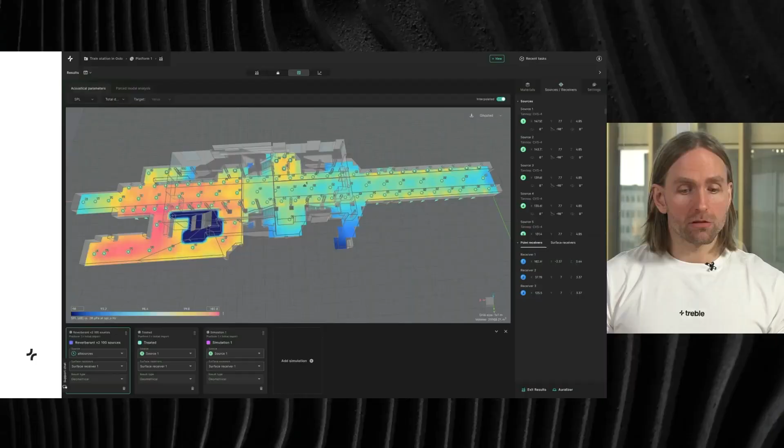Okay, before diving into the SDK, just 30 seconds on the application in case you're not familiar with that product. The Treble web application looks something like this. It's a fantastic simulation software for a variety of use cases. I've summarized perhaps the main ones here, which is architectural acoustics and sound system design, acoustic materials, we have a lot of material manufacturers and vendors who also use the application, and soundscape design. And exactly 3 weeks ago, we had a major webinar event where we unveiled the biggest update we've ever released on the web application.

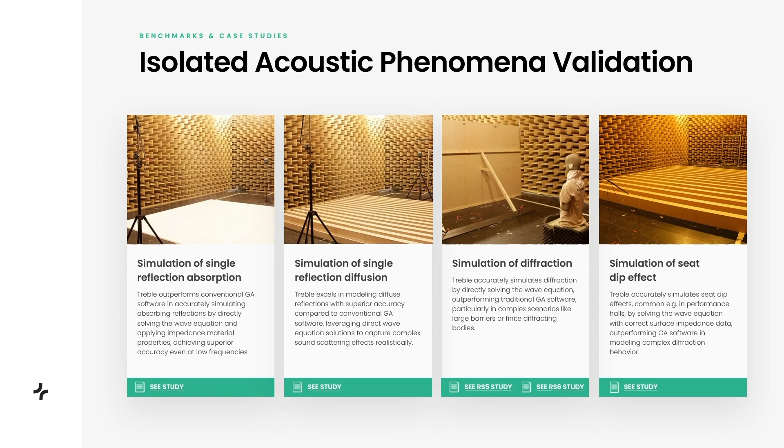We have applied it to isolated acoustic phenomena cases, such as diffraction around an object or reflection of a complex surface, benchmarking against a good database of measurements called the Benchmark for Room Acoustic Simulations. We've also applied it to several types of rooms and environments and shown a very good match between measurements and simulations.

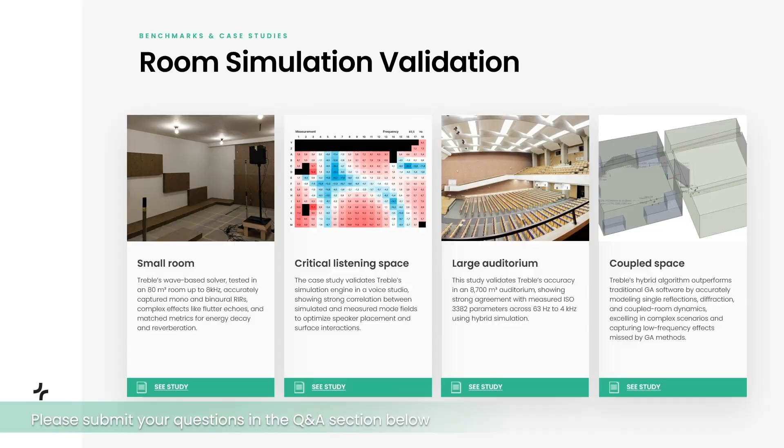Okay, that was the intro overview presentation. I think we now just dive into the use cases and the demos.

First use case we're going to dig into is product virtual prototyping. By extension, we'll show a lot of the fundamental functionality of the SDK and how to set up a single simulation, work with the results, and post-process them.

Let's imagine that you are a headset manufacturer and you want to optimize the headset you are designing or producing, either the hardware itself, the form factor, the positions of the microphones in the microphone array, and you want to be able to virtually prototype that in a variety of acoustic conditions. Or you're developing some kind of algorithm within the device, potentially a data-driven DSP algorithm, and you want to generate high-fidelity data to train or evaluate that algorithm. That's exactly what the SDK is made to do, and we'll show this right here and now.

So in this kind of scenario, you would like to set up a virtual audio scene. An audio scene can look something like this. It's a simplified sketch where we have the receiver device in question with some microphones on it, some environment with furniture and things like that, target sources like speech sources you want the device to pick up, and distractor sources like a coffee machine that you want to reduce. We can set up audio scenes very easily in the SDK, have them simulated with high precision, and render device-specific output for those scenarios.

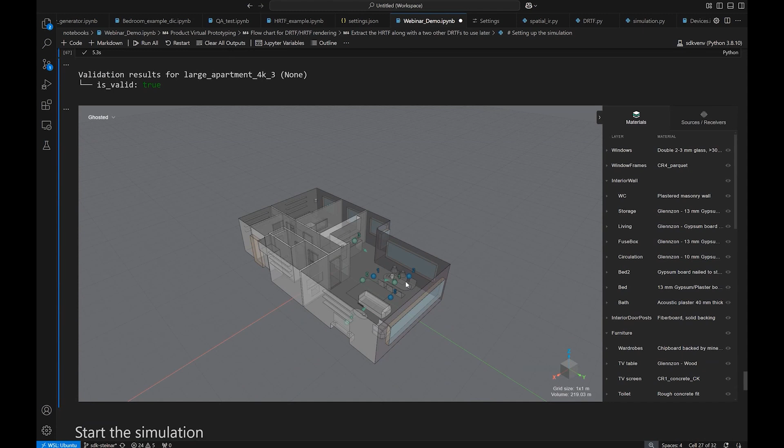And we can plot the setup of this audio scene that we've now generated. We can see something of a dinner party, where we have a couple of sources which can be people talking - this is the speech source, this is actually the omni source - and then two sources here, which could be distractor sources from the TV and from the coffee machine, say. Then we have three receiver positions, these spatial receivers, which we will mix with the devices in post-processing. We can see all the materials we assigned and so on.

All right, and in order to run this simulation, I would simply run these 3 lines of code here. It takes a few minutes to run, but I've already done it to save some time. So we can simply, with these lines of code, fetch the latest simulation results from this project.

And we see here the impulse response. If we zoom in on the direct sound and the early reflections, we see that microphones 1 and 2 have the same amplitude. These are the microphones on the left side. And then the microphones on the right side have lower amplitude and of course also arrive at a later time.

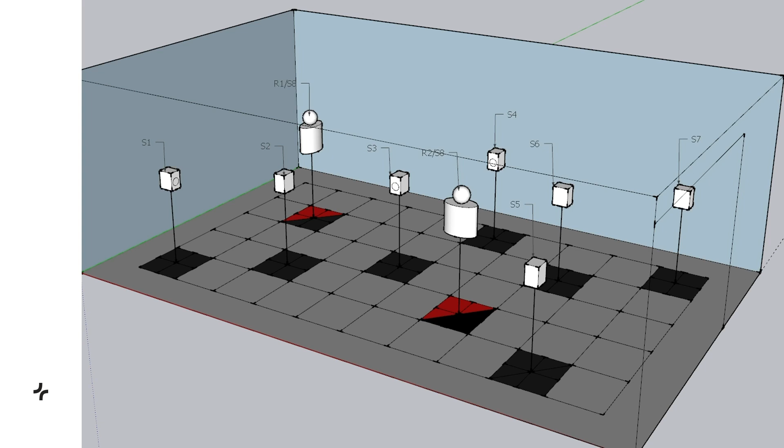Okay, let's first look at the empty room. It looks something like this. We excite the room with a directional sound source, and in the simulation we also use a directional sound source. We consider a variety of source and receiver combinations, and in the simulation, for the binaural part, we use the approach I showed earlier, where we simulate a spatial room impulse response, and then in post-processing we mix the spatial impulse response and the HRTF to get the binaural or device-specific output.

But if we first look at the mono results, here in the time domain, we see an excellent match between measurements and simulations. The early reflections are captured very nicely, and the overall energy decay as well. In the frequency domain, also a great match. The low to mid frequency modal behavior is captured nicely, and the high frequency trend is also captured very well.

Energy decay at different frequencies looks very spot on. It of course helps that in this case we know the material properties of the wall materials quite well, so there's good input data into the simulation. These are acoustic parameters. This is T20 and this is early decay time. Great match observed. Note, for example, here in the mid frequencies, this interesting increase in reverberation.

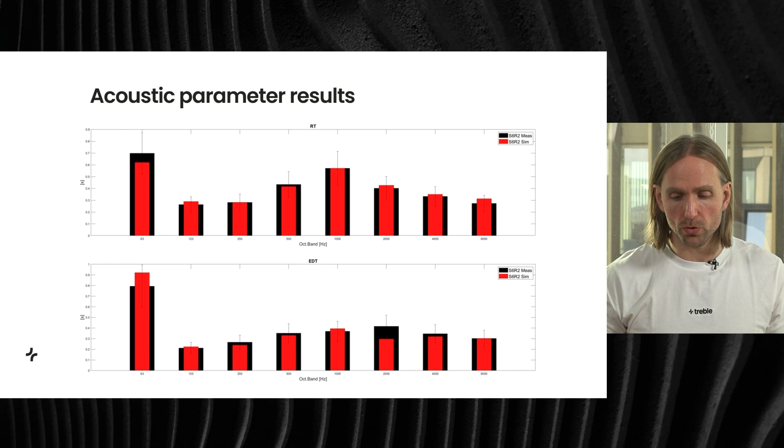This is due to a 2D sound field living between two hard parallel surfaces, which is very well captured in a wave-based simulation. And then the binaural results also look fantastic. This is the right and the left ear for one particular source-receiver combo. Clearly the receiver's right ear is facing the source. We can also have a listen.

Here we have an anechoic recording of a speech signal and a music signal. And then we've convolved that with the binaural room impulse responses, both the measured ones and the simulated ones. And let's have a listen. First, the anechoic speech sounds something like this.

Noise and poor acoustics have been shown to be a major factor impacting our health, well-being, and productivity.

And then in the measured room.

Noise and poor acoustics have been shown to be a major factor impacting our health, well-being, and productivity.

And the simulated room. Noise and poor acoustics have been shown to be a major factor impacting our health, well-being, and productivity. And for the music, first anechoic.

Measured room. And the simulated room. I hope it comes through clearly in the webinar and in stereo and all that, but I can at least say in my totally unbiased opinion that they sound actually very similar.

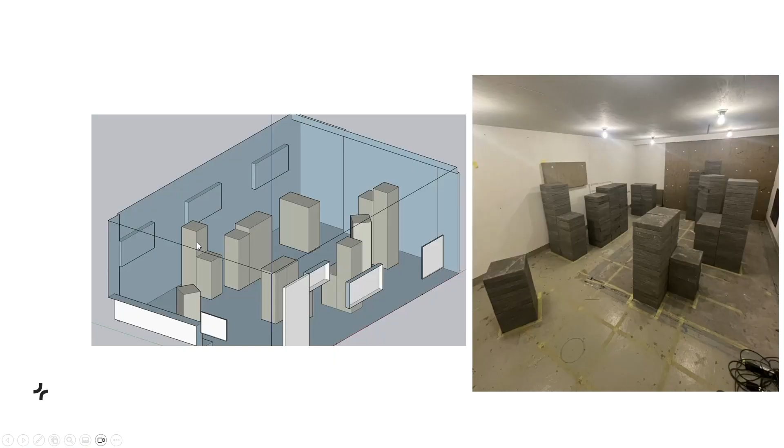Okay, now we turn to the complex geometry case where with all the bricks, the 10 tons of bricks, it looks something like this. So the geometry of the room has been modified substantially, and it's a much more complex case, you can say. But the results look, I would say, equally good as before. Here we're looking at mono results, time domain, excellently capturing these early reflections. Room modes, again, captured very nicely, and the overall high frequency trend as well.

Energy decay still looks absolutely spot on. And binaural results with the KEMAR mannequin also look fantastic. Look at these early reflections here and the difference between the right and the left ear. Same with the frequency response, the room mode behavior here, and the high frequency trend, the ear canal resonance, and these things are all absolutely captured in the simulation.

And finally, the furnished case, where it looks something like this. And yet again, measurements and simulations match up very well. This is one particular source-receiver combo. Here's another, looking equally good. Energy decay, very good. And binaural results look excellent as well. Here in the frequency domain.

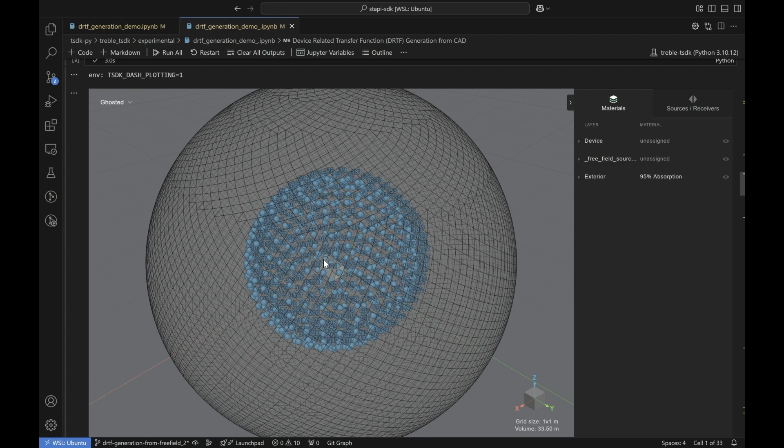Then I can simply run it here, or if I've already run it, which I've done in this case, then I can fetch the results from some IDs and plot and explore and so on. So this is the setup of the DRTF simulation. So the domain is a sphere here. The device is in the center, and then there are all these receivers around.

And if I zoom in here, we can see the microphone positions here, and then we simulate essentially the free field response from all these microphones to all these receivers on the sphere. And that's then what makes up the DRTF dataset.

Once the simulation is run, we simply run this create DRTF command, and that's already been run, and we can add it to our library of devices. And that's it. Then you have your DRTF, good to go, ready to augment data, create 100,000 room responses with this device in 10,000 different audio scenes or whatever you would like to do.

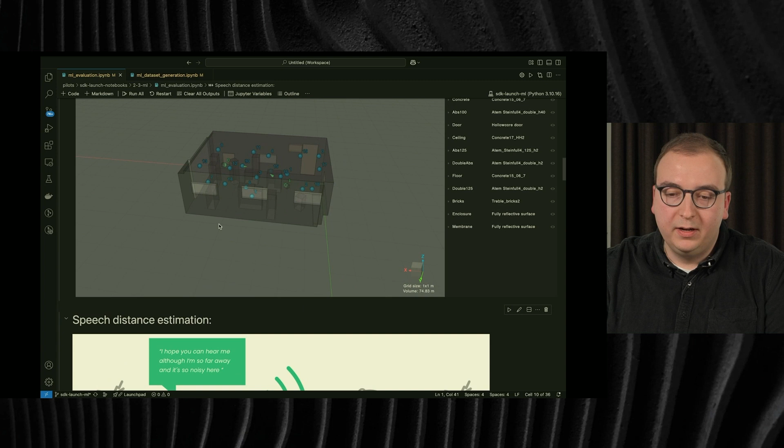And I want to start by just reading in the simulations that we have done, and I can show you once again what this looks like. In here we have a couple of source receiver configurations, but because these were done similar to the measurements, we only have a couple of them. In fact, it's only 20 source receiver configurations because doing the measurements just takes a lot of time and it's kind of costly. That's why we only have so few points at first.

And what we want to do is speech distance estimation, as I already said before. And you can think about this similar to this application scenario here in the picture. We have somebody who is speaking with a friend, and the friend, for example, has some AR glasses or some other wearable that has a microphone on it. And the person is speaking, and we record the speech with the microphone.

And from that recorded speech, which might be, first of all, quite noisy because we have background noise in there as well, but most importantly, it is reverberant because we are usually inside of rooms. And based on that reverberant, noisy speech, we want to estimate the distance between the speaker and the listener. And this information is very important, for example, if we want to run some speech enhancement or de-reverberation algorithms on the AR glasses or on the wearable device.

And I want to use the following neural network to showcase how we can use the Treble SDK and the simulations for evaluating a neural network. This network was proposed in this paper that you can see referenced here.

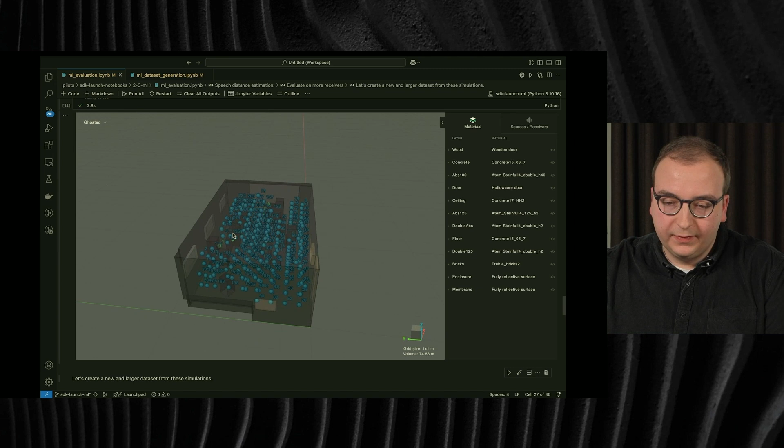So let's have a look at another simulation that we ran from the same environment where we added more receivers. And as you can see here, we have now added very many receivers in there, and they are on a very dense and fine grid of receivers throughout the room. So by using this simulation, we can get a bit more, or actually a lot more comprehensive overview of how our model performs on this specific task in this specific room.

So let's set up the dataset again and run the evaluation once again. And because we have now so many source receiver configurations, this takes a bit more time. But this is also then down the line very interesting for us because we have more receiver configurations. We have just a better overview of how does the network perform. So let's wait until this completes.

All right, the evaluation completed, and we see now a mean absolute error of 1.62 meters, which is still very similar to what we saw before, but we can also now, of course, have another closer look at the results. And we see here on the left side the Treble simulations with only few data points. In the middle, we see the measurements with the matching data points. And on the right side, we see the Treble simulations where we have a lot more receiver positions in there.

And we see, of course, there are similarities between all of those, but what is very clear as well is that we have more receivers, and some of them seem to be outliers where the performance of the network is not as good as for the 20 selected points that we were able to measure. So this is, of course, very interesting for us because without having to do lots and lots of measurements, we get a lot more information about the performance of our model. And now we can also easily have a closer look.

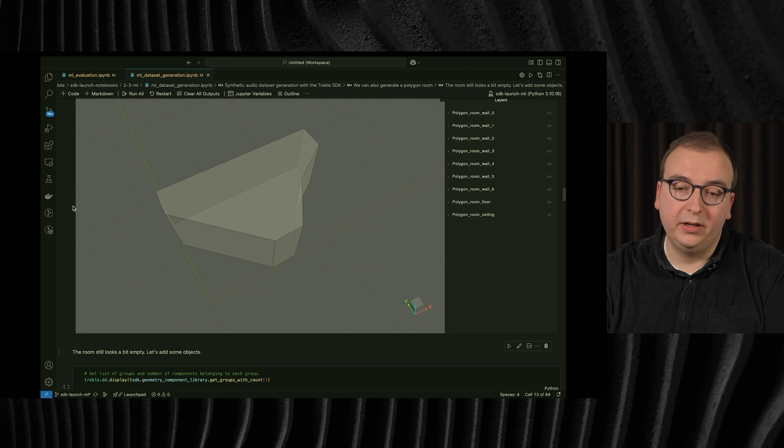All of the rooms that we've seen so far were pretty empty. So this is, of course, maybe a bit boring. So let's add a couple of objects into the rooms. Also there we have you covered. We have a geometry component library, and you can see here we have a couple of different groups in there, for example, tables or beds or sofas, and all of them have already a couple of objects in there.

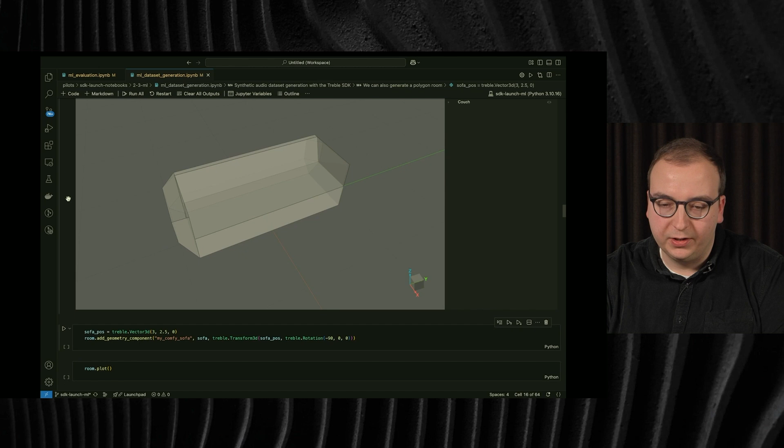What is very important to note here is that this database is being worked on, and we will get more of those objects very soon. So let's start with one of the sofas. This looks something like this. And already here you can see, of course, this is not a sofa that I would put into my flat, but it's actually one that is optimized for room acoustic simulation. So you have nice and flat surfaces, and it's just kind of easy to use.

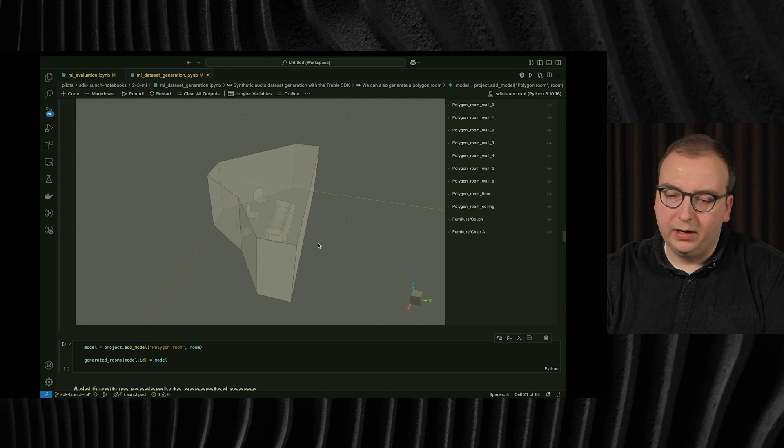Let's place the sofa now in our room, and we see, okay, we have our polygon room and we have the sofa in there. Maybe let's add a couple more chairs. The chairs look like this, and we just add 3 of them. And now we see, okay, we have our polygon room, we have 3 chairs. This will not win an interior design award, but this is something that gets us started.

If you don't want to place these furniture objects yourself, we can also randomly add them to the rooms, and this is what we're doing now. In this case, we use our geometry component placement, where we can say we want to place, for example, a table or a chair or a sofa, and we want to have a certain count in each room, which is usually the maximum count, because sometimes the rooms can just be too small and we don't fit all of those in there. But then we say, okay, they can have certain angles. For example, we want to orient the tables in 90 degree angles, and they should have a minimum distance from other objects in the room or from walls, something like that.

And we will now do this and populate all of our 200 previously generated rooms with furniture. As you can see here, this is taking a bit of time, but those are now randomly placed into the rooms.

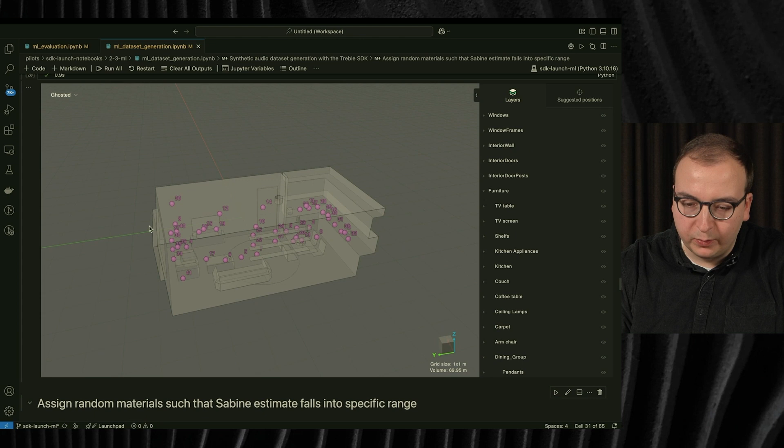And if we want to have a look how this room looks like, we can do that. And we see, yes, this is a living room where we have a nice sofa in there and some armchair in there. And we have some table with chairs as well.

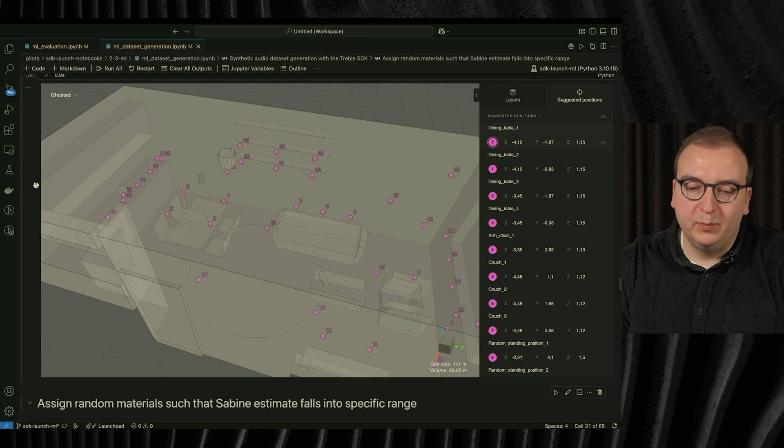And what you can see here as well is actually the suggested positions. You can see here we have suggested positions at the dining table, for example, but also then at the armchair and the couch and so forth. These suggested positions will be very useful for us later, because at these positions we can, for example, place sound sources or receivers. This way we can place them at positions that are actually meaningful for that scene.

What I want to do now is randomly add materials to all of the layers. Once again, we see here the material library that Finnur already mentioned. We randomly place the materials at all of the 300 rooms and make sure that all of the material assignments are within a Sabine estimate of 0.4 seconds and 1 second.

Now that we assigned the materials for all of those 300 rooms, we can have a look how it looks like, and we can see we have generated a T-shaped room, and we have assigned the materials, and we also assigned the materials to the furniture that we added.

Now I want to go back to this application scenario that I already mentioned in the previous notebook. So we want to do speech distance estimation. We have some speaker talking with somebody else, and this other person has a headset or AR device, for example, on it with microphones, and we want to estimate the distance between those two while we have background noise.

To simulate this, we will add a couple of directional speakers in our scene, and we will add a couple of noise sources, which are omnidirectional sources, into the scene. In addition to that, we will add a couple of receivers, and those will actually be spatial receivers in this case, second order ambisonic receivers, but we could also, if we wanted to, go up to 32nd order of ambisonics.

I am Daniel, I'm the product manager of the Treble SDK, and I'm going to show you a few use cases here at the end.

So the first one is this parametric study where we examine a studio, this one here, and we're going to place subwoofers in different positions and evaluate which one is best for the coverage and for the typical listening positions in such a studio.

Then we're going to put in 2 full range speakers so we can have a nice stereo experience in this recording studio.

What powers this parametric study is this very nice feature that is coming with the Treble 2.0 release. We call it the boundary velocity feature, and it basically enables you to model any speaker that you may desire.

You can think of a speakerphone on a table, or a smart speaker, or some floor speaker in a living room, or these full range speakers, a subwoofer in this recording studio.

Essentially, you have a CAD model, or we help you generate a CAD model, and we take care of anything for you in terms of doing this boundary velocity.

Essentially, you just have to specify the membrane that vibrates, and then we assign some velocity to that, so it's like a piston moving back and forth like a real loudspeaker, and then some simulation settings so we can get the correct directivity and source correction filters and so on.

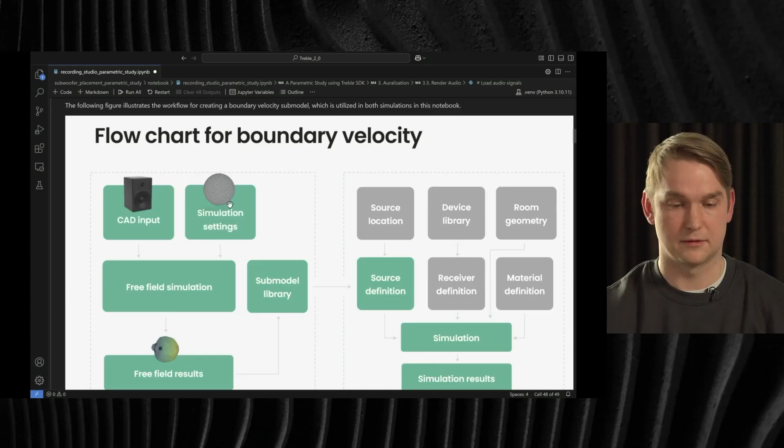From that, we create a free field simulation and an anechoic simulation of the device, and that will give you some free field results such as source correction and directivity.

We import that into a submodel library, and then you or anyone in your organization can use that when you define sources and create simulations.

So here I am analyzing a recording studio, but maybe next week a colleague of yours is doing a living room and they need a subwoofer model. Well, then they can access this shared submodel library.

You already did all the work. They can just import that into the simulation and they have a subwoofer.

So let's get started. First, I just log into the SDK and I get this project, subwoofer placement.

And then the first thing I do is construct the subwoofer. So here I make a free field model based on a CAD geometry.

Here I import a 3DM file of a subwoofer. And then this gives this free field model where we see the subwoofer in the center and this kind of anechoic sphere around it.

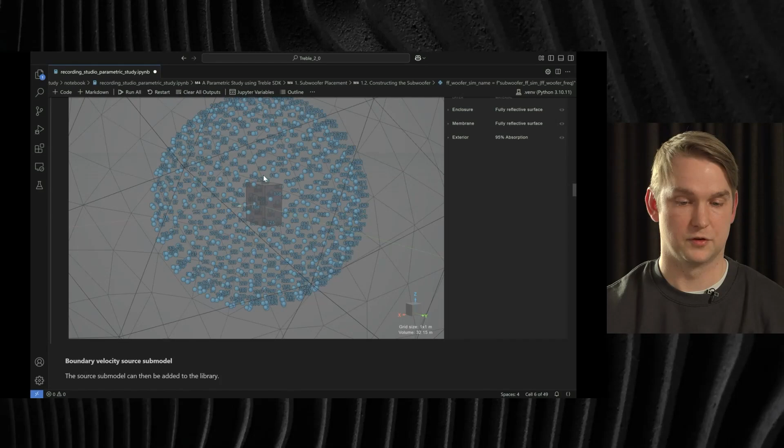The next thing to do is we create this free field simulation. So if you recall from the flow diagram I just showed you, we have a CAD file and then we have some simulation settings. Those two combined give us this free field simulation. So that is essentially what we're doing here, specifying the membrane that vibrates and so on. So that will look like this. So suddenly there is a sphere of receivers around the device that we need. You can see the membrane here and so on in the plot.

And then the last step in defining this boundary velocity submodel that can then be injected is to add it to the submodel library. And that sends the CAD file of the loudspeaker. It sends information about the directivity and the source correction filters needed. What this enables you to do is now I can inject this CAD model into any room.

It uses the actual CAD model in the wave solver, accounting for diffraction of the edges of the box and so on. But we also have the directivity information, which means that if I choose to run a hybrid simulation, I can account for the CAD geometry of the speaker up until the cutoff frequency of the wave-based solver, and then above that frequency we use the directivity and model this as a directive point source, which is in my mind a very strong feature.

You can, since it's a CAD model, also place it very freely in the model. So I could place this source on a table. In this demo, we place it on the floor. It could also be on the wall.

So with the source ready, we can go ahead and define the room. So here I use the import functionality of the Treble SDK to import this studio control room. We use the 3DM file here, and we do a check to see if the geometry is valid. We do that on all imported geometry, so we check if it's watertight or there are any other errors in the model. And here we see it.

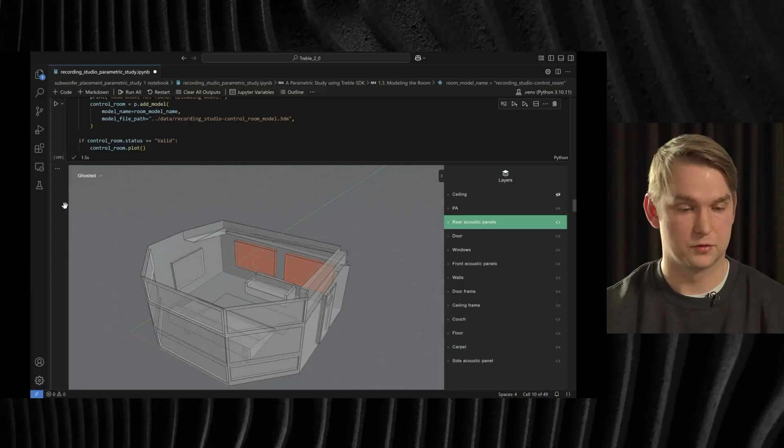Yeah, it consists of a couch, this mixer in the front. Can maybe use this here to highlight. We see some windows. We have these rear acoustic panels that we're going to work a little bit with. So I'm going to demo how you can build your own absorbers in Treble quite easily using our material builder. So essentially I just need to define 3 parameters to create a new absorber in Treble using this porous material builder. So I define a porous layer thickness of 50 millimeters and a flow resistivity of 10,000.

And then finally, I also want to have an air cavity behind this porous layer, and I say that in this case it's 100 millimeters. All the materials are then terminated with a rigid backing. I can then go ahead and run this code. I've built the material and added it to the material library, and we plot it just to verify that it looks as we expect across frequency. We can see the absorption coefficient here, but also the reflection coefficients over here on the right.

The next step in setting up a simulation is that we want to pair the layers in our room model with materials. So we take, for example, the couch layer here, and we pair that with upholstered seating, well upholstered. And we use the material library in the Treble SDK to find this material. Similarly for the walls, we find some gypsum material that we like, and so forth. Most of these materials, except for one, we just use the Treble library that's free for everyone.

That is, a user of the Treble SDK. We have hundreds and hundreds of materials that you can use for the walls, ceilings, carpets, and floors, and so on. And then in the bottom here, we see we have this new material that we assign to these rear acoustic panels.

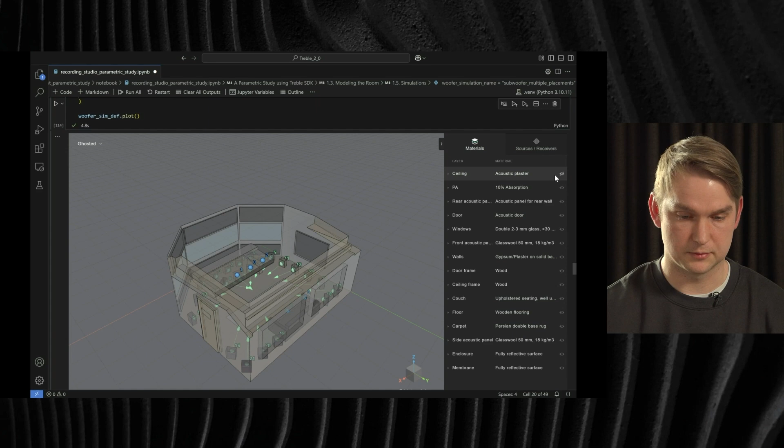With sources, receivers, and materials defined, we can go ahead and create a simulation. So we do that by making a simulation definition. Here we specify that we want to run a full wave simulation. We want to use the control room that we imported with the material assignment we just did at a crossover frequency of 400 Hertz. So we can go ahead and plot the simulation definition. I'm just going to hide the ceiling here so we can take a better look inside. We have 21 different subwoofers placed along the edge, and then we have these 5 spatial receiver locations here.

And we're going to run this in the cloud. If I had to run this, it would take a handful of minutes probably. Here, for the flow of the demo, I'm just checking if there's already a simulation in place, and there is, and we can then continue with those results for the parametric analysis. So here I'm fetching the results with this get results object.

What I'm then going to do is we have defined a cost function that essentially scores the different subwoofer placements. It takes into account the evenness of the frequency response. I don't want a subwoofer placement that causes a large dip in my frequency response that could indicate some modal behavior going on that's not very pleasant and something that you want to avoid. We're considering that there is a good energy balance on either side of the 100 Hertz mark. And then finally, the subwoofer placement should also have as little variance across all 5 listening positions as possible.

We are basically now in the post-processing stage, so I can go ahead and evaluate the cost function in all the 21 different positions. It's very fast. We want as low a cost function as possible. So we immediately see that to the right of this mixer, there is a very good placement candidate here. But we also see over here towards the right wall that there are some quite good placements as well, probably due to the walls having quite a bit of absorption here.

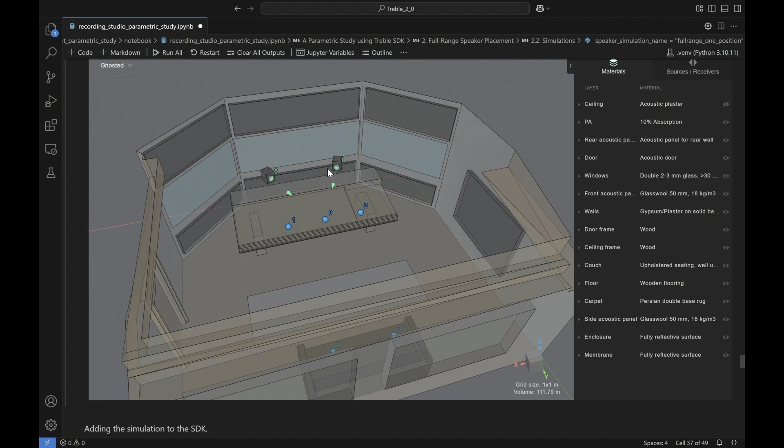So here we see the simulation definition with the 2 speakers in front of the mixer pointing towards this center position here. I can then add the simulation to the project. Again, I have already run it, so it checks, okay, it's not necessary to run this again. And I can then work with these results in the auralization part of this demo.

Before I do the auralization, I want to create an HRTF device essentially. Here we used a measured HRTF on a KEMAR mannequin. I apply the HRTF device on the subwoofer IR, but also of course on the left and the right channel. Then we have added the functionality to do filtering also on IRs. So we have a filter object that works on the IR object, in this case on the device IR, but it could as well have been a mono IR or a spatial IR.

For the woofer, I want to have a low pass filter, so I define a cutoff frequency of 200 with an order of 6 for the Butterworth filter. And then I also include a gain filter with a 0.3 to ensure that the woofer and the full range speakers have the same level. For the full range speakers, left and right channel, I use a high pass filter, also with a cutoff frequency of 200 to have the correct mix. And then it's very straightforward to combine the device IRs here. So for the left channel, we use the subwoofer plus the device IR for the left channel, similarly for the right channel.

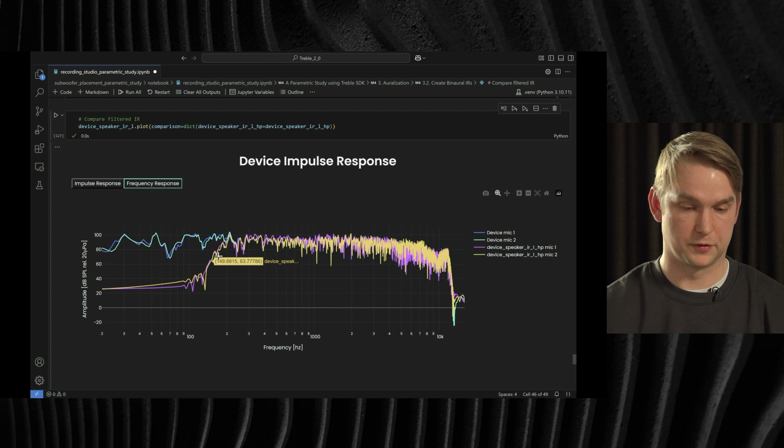We can then compare the filtered impulse responses. So if we look at the frequency response of the full range speakers, we can see that we apply this high pass filter here with a crossover frequency of 200, and we see it behaves exactly as we expect. So then we can convolve these device IRs with an audio signal. I'm just going to do that here. We are standing here in the center position of the recording studio and listening back to how does it actually sound.

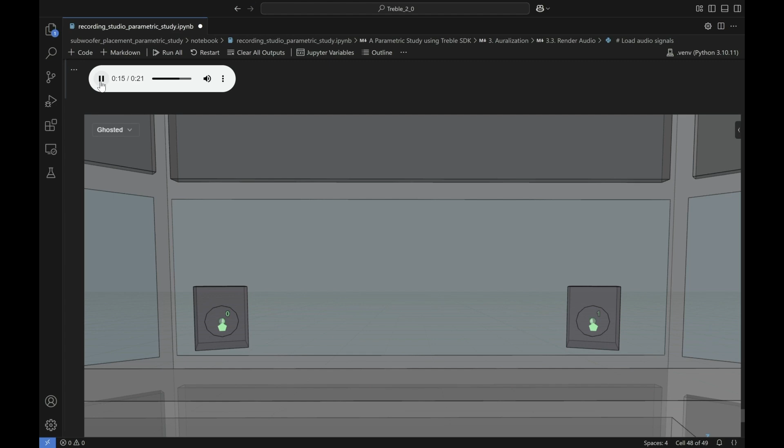So I hope this demo showed that it's very straightforward to do very advanced modeling in the Treble SDK. We import this loudspeaker geometry, we assign boundary velocity to it, we parametrically place it in the recording studio with fast simulations. We get the modal response and we can make quick decisions of where should I place this subwoofer in the room. Then we add in full range speakers with a hybrid simulation, and we can analyze the room and see, is this really a good fit? And it seems it is. And you can do this over and over again to converge to a result that you are happy with.

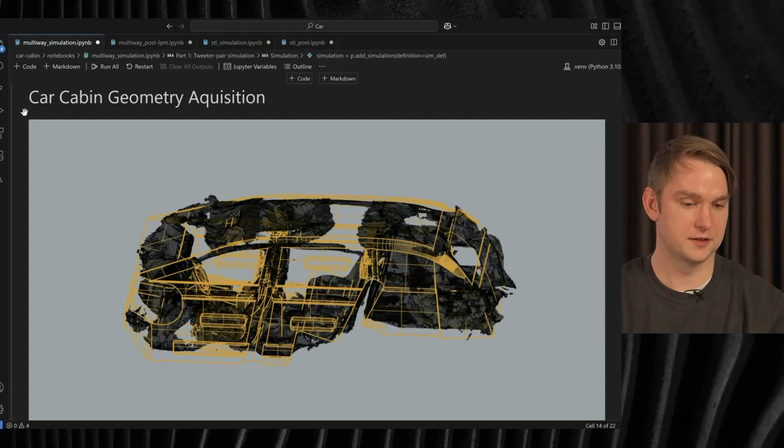Okay, next demo. Something different, but not completely. We're still in sort of the boundary velocity domain, but a very different environment than the recording studio we just visited. So this is a car cabin, and the initial geometry was obtained through a LiDAR scan, thanks to a very good collaboration with our friends at Audi. So thank you very much for that and the good collaboration.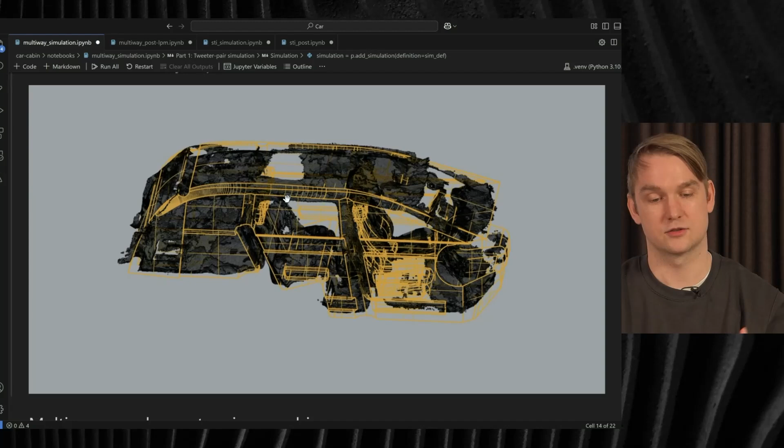We did a scan of this car and then imported that LiDAR scan into a CAD tool for further processing, putting in some more details and using the LiDAR scan as a background to essentially make the car model from. And then that car model can be uploaded into Treble to perform an acoustic simulation on.

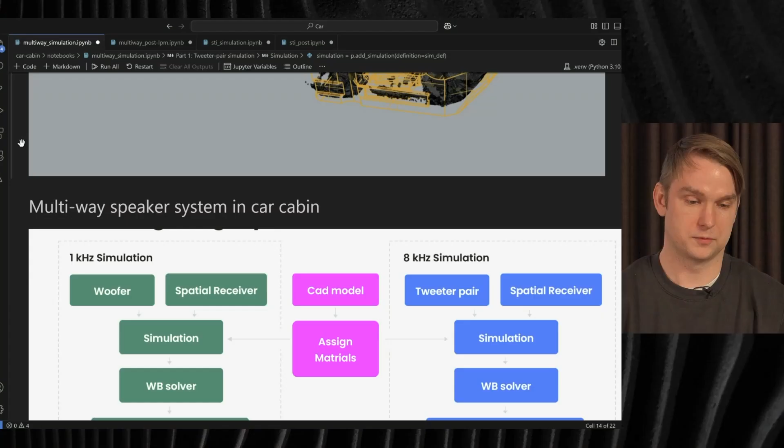So what we're going to do here is model an infotainment system in a car, a multi-way speaker system. We're going to do a 1 kHz simulation of a woofer in the trunk, and then a spatial receiver in the driver's seat. And we're going to do that fully wave-based up to 1 kHz. Then we're going to do a KEMAR rendering as we did before for auralization purposes. And this time the filtering will be done with a Thiele-Small parameter model, lumped parameter model. So we are going to create a physically informed filter here.

And then we're going to do an 8 kHz simulation of a tweeter pair situated in the car doors, also with the spatial receiver in the same position at the front seat. And this 8K simulation will also be fully wave-based. We're going to get some spatial impulse responses from that. We will render it with an HRTF of the KEMAR mannequin again, and then the tweeter response will be made from a lumped parameter model here as well. We'll combine them and then do a nice auralization at the end.

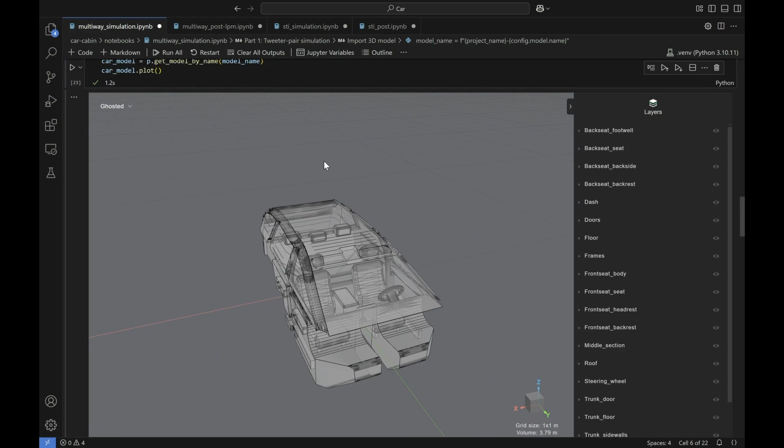So for the tweeter pair, let's first log into the SDK and fetch the car cabin project here. We're going to quickly import the 3D model of a car into Treble. That was fast. Look at this model, quite complex actually, and it's right here.

I'm impressed every time. Sorry about that, but this is just really, really cool with the level of detail you can do in the software.

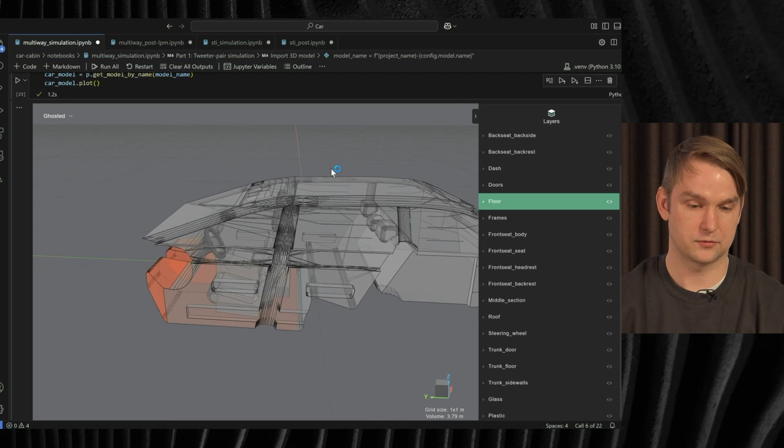Out here on the right, we see it's a very complex model. We have a lot of different layers that we have to assign materials to. So in the next step, the material assignment function is very condensed. We use a config file here for the material assignment that's hidden away, but of course available with the notebook. Just gonna run this here.

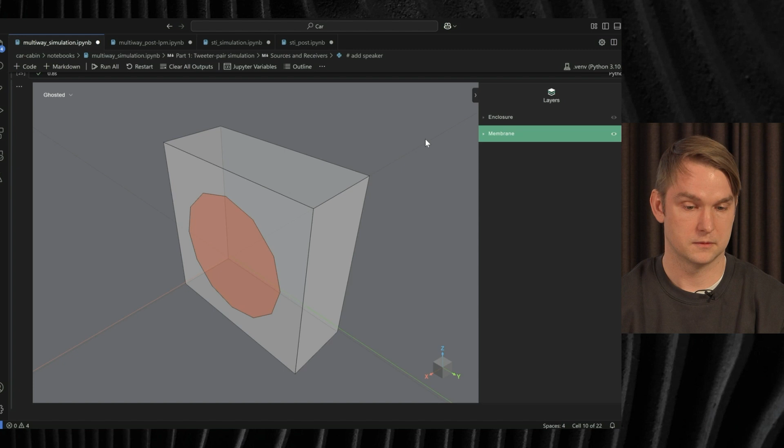And then we are gonna load a tweeter submodel. This time we're just gonna interact directly with this boundary velocity submodel library. Gonna query for the speaker name, and we have our tweeter. No further things are needed. We can just directly use that in the source list to make a boundary velocity source in the car doors. And then we're placing the receiver in the listening position in the driver's seat.

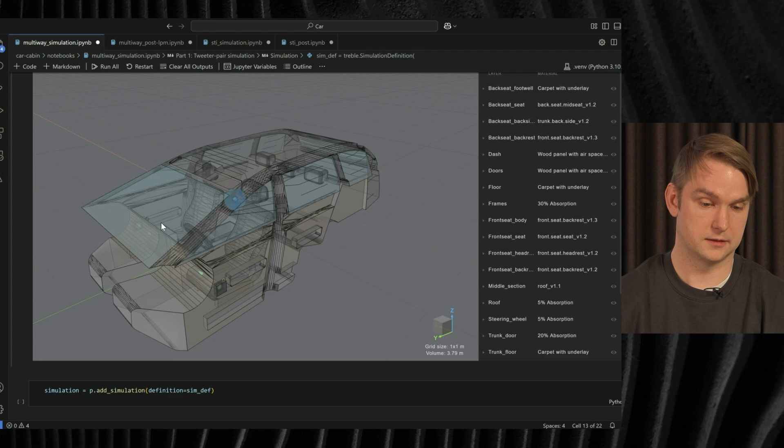So that's basically it. And then we will create a simulation definition with an upper frequency limit of 8,000 Hertz. So then the simulation model of the car will look like this. We have the tweeters here situated in the doors, left and right, and then we have the listening position here in the driver's seat. 5 blocks of code. You have a car in Treble plus a tweeter pair.

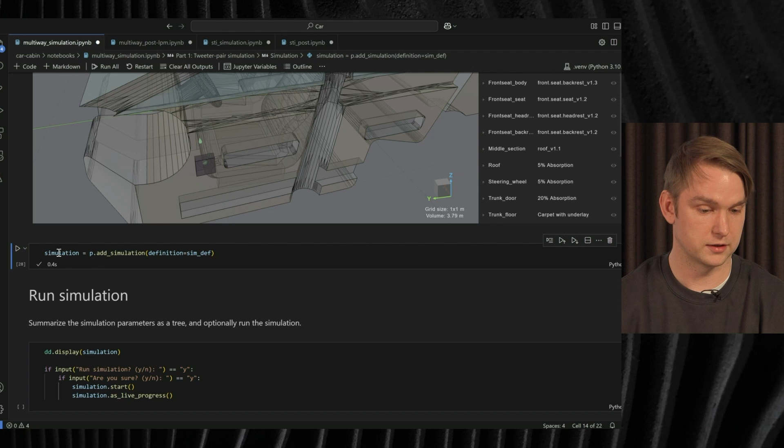Gonna add that simulation to the project, and then we can choose to run it. For the sake of time, I'm not going to, but you have this left-right channel and then this receiver. Computational time of something like this, 8 kilohertz, very high fidelity, very accurate, and very detailed model: it's 1 hour. One source, one receiver is 1 hour.

In this case we have 2, but the simulation time is still 1 hour because we are a cloud company. So we send the simulation to the cloud and we just spin up 2 GPUs instead of 1. And it would be the same if you have 16 loudspeakers in your infotainment system. It will still only take 1 hour to do this car in Treble.

We move on, and we also want a big, nice woofer in the trunk of our car. So we query the submodel library for a woofer with a 1 kilohertz simulation. We can add that to our source list, and that can then be added to the simulation definition. So this is a new simulation we're doing.

We're reusing the car model, but now we are injecting a subwoofer into the trunk of the car, right here. And now we're going to compute the impulse response from the woofer to the spatial receiver in the front. We can add the simulation to the project, and then we can run it with these lines of code. Again, we have already run it, so I'm going to press no here.

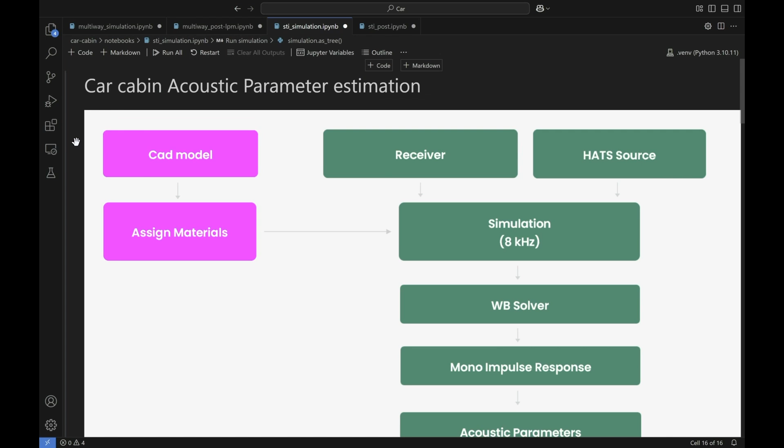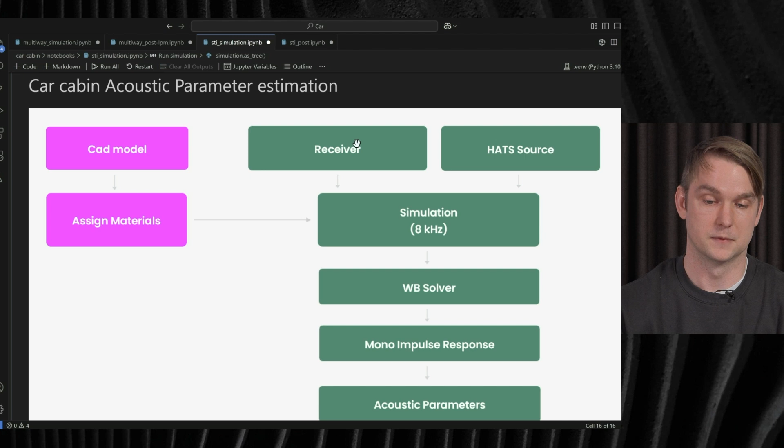Where we again will use the same car model with the same materials, and here we're going to inject an entire mannequin into the front seat, and then place receivers at the passenger seat location and also in the rear of the car. And the simulation will also be run up to 8 kHz, wave-based of course.

And then we're going to look at some acoustic parameters, in this case the speech intelligibility, and analyze that.

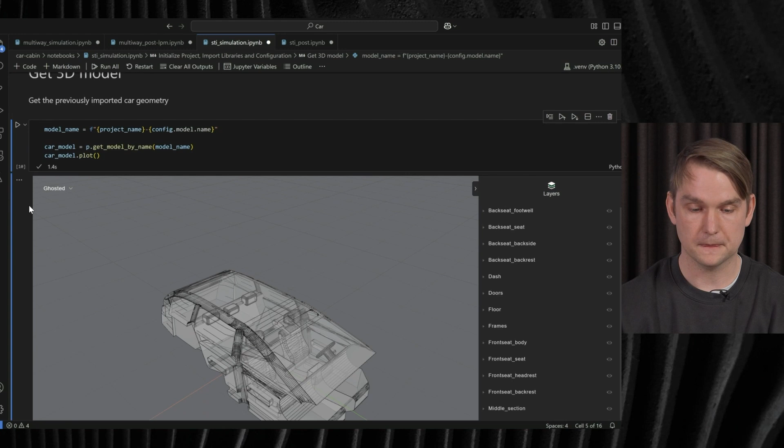So again, we're logging into the SDK and fetching the project and so on, and then we are loading the car model in again. It's the exact same model as before. We're going to assign materials in the same manner.

And now the difference comes, you can say, so that's in the source modeling. We have a scanned model of a mannequin here, typically used in many different measurement setups in cars, but also communication device modeling and headphone modeling and so on. But here we choose to use it in the car.

We have this surface here. You can assign a boundary velocity source to it. So I'm just going to add that to the source list, and then at the same time we are making these 3 mono receivers, 1 in the passenger seat and 2 in the rear.

And then we're going to create the simulation definition up to 8 kilohertz with the car model, and then we're going to plot that here.

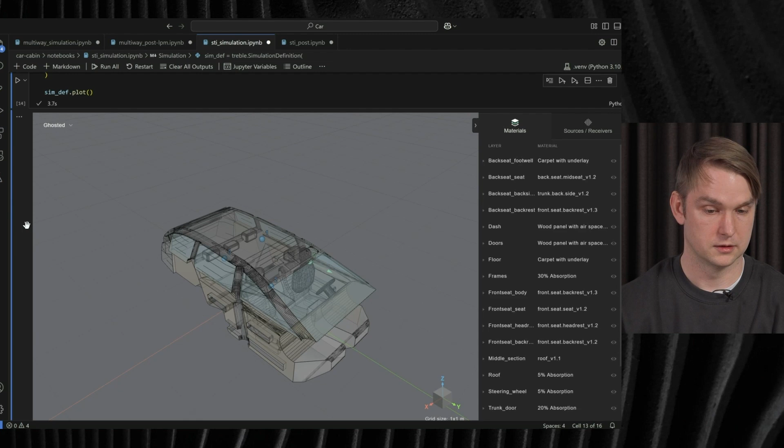Few blocks of code, and we can inject the mannequin into the front seat. I think that's really impressive.

Then we can use that as a speech source and compute the impulse response functions to the different receiver locations and use that for the speech intelligibility analysis.

So we can quickly add the simulation to the project, and then we can decide if we want to run it or not. In this case, the answer is no. In your case, if you want to try this notebook out yourself, it will of course be yes for the first time.

So yeah, now we have a simulation here, and we go into a post-processing step. Here, I'm just going to again log into the SDK, and then we're going to fetch the project, the simulations and the results, and then we will use this plot acoustic parameters function that you can do in Treble on the results object.

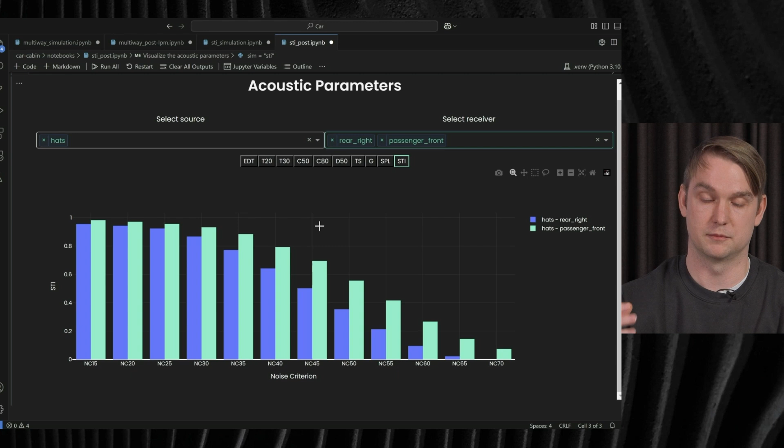And in this case, we're going to do STI between the speech source from the mannequin and two different positions in the car. So here, I think it would be very nice to compare how's the experience of the passenger in the front versus a passenger sitting in the rear to the right.

Yeah, I think that was it for the car demo. I hope you liked it. I think it's very exciting that you can not only do rooms in the SDK, but you can also upload way more complicated geometries like cars and so on.